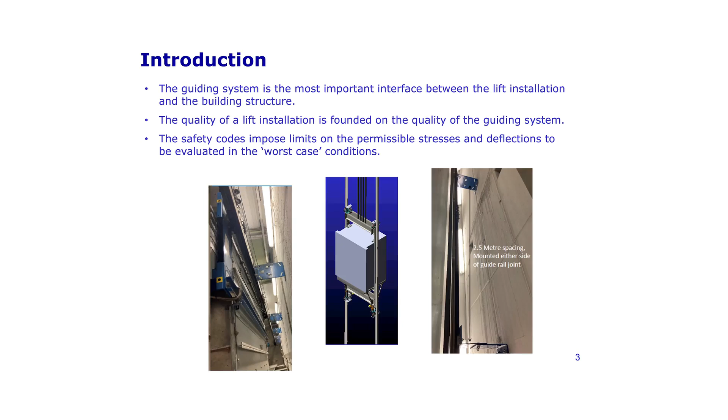So the basis of this paper comes from a few years ago when we looked at EN 81-20/50 and the new requirements about deflections of guide rails. And these are some reflections here. Okay, so let's go on. The guiding system is the most important interface between the lift installation and the building structure. The quality of lift installation is founded on the quality of the guiding system. The safety codes impose limits on the permissible stress and deflections to be evaluated at the worst case conditions.

And to do that, we have got in the codes quite straightforward models. So I will explain some fine aspects of those models. They are very simple, but there are some aspects which I found not everyone knew. So I will not be discussing CAD, okay? However, CAD can be used, and we know that FEM analysis is one of the code-approved methods to do analysis. I will show the straightforward models, which are simple analytical expressions coming from classical mechanics.

Okay, so I will demonstrate this in terms of what would need to be the spacing of brackets to meet the requirements, for example, of deflections. And we know that there is a straightforward way to do it. So I will show also some numbers here to illustrate those before making some further work in terms of more complex scenarios.

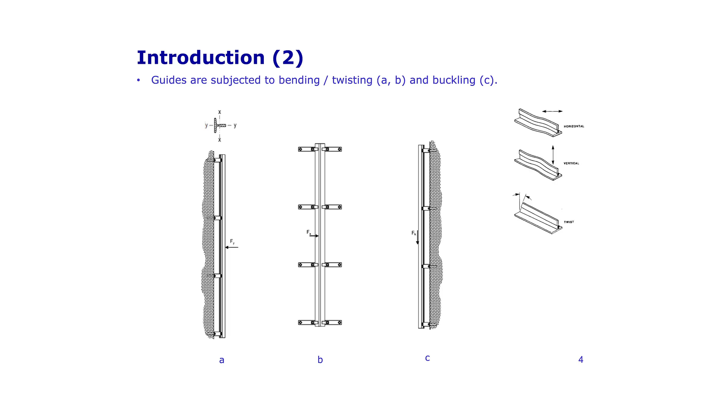Okay, so we know that in EN 81, and other codes as well, the guides are considered to be subject to a different range of loads. And here in examples, everyone knows it's subject to bending. Okay, the older code is also saying that there's twisting. Yes, it does. However, when you do bending of the flange, this actually can accommodate this. And also we have buckling and different scenarios, and everything is based on the worst case scenario. So the straightforward models in EN 81-20/50 are based on the worst case scenarios.

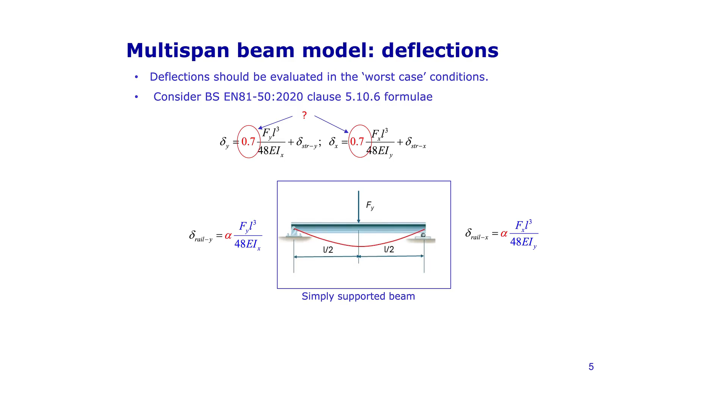So what the models are, whether they are sufficient to make the judgment, and how confident we are with the results, everyone knows that affects the design. Okay, so deflections should be evaluated at the worst case condition. Okay, so that we know. So for example, safety gear operation, acceleration, deceleration.

Obviously that is linked to this equation here, which accommodates the dynamic conditions. Because if we look here, EN 81-20/50, clause 5.10.6, has got these two formulas when you are bending in two directions, y and x, okay? And we know them very well, everyone has seen those. And the point is here, the first question which was established here: the coefficient 0.7. Where is it coming from? Because everyone probably knows from fundamental mechanics this blue formula here, that's for a simply supported beam.

So we are not using a simply supported beam model to evaluate deflections in guide rails. It's something else. So what is it? Does someone know? I'll give an answer right now. So basically, this coefficient alpha here, if we used this, would be 1, but it's not. It's 0.7. Okay, the answer is actually quite straightforward.

If we look here, if we take the classical, simple model when the guide rail is treated as a multi-span beam subject to lateral loading, okay? So we've got a load, and I'm looking now at one direction only. This is not the simply supported beam anymore, because it's got multiple brackets. And that's basically what we see, okay? We have a very long beam with multiple brackets. Okay, so if we calculate deflections of this, and you can do that, that's not difficult. You can do it with a simple calculator.

You don't need to have a big computer power. That's a classical method. That's the equation, how you do it. Basically, that's the deflection. So deflection y, that's z-axis here. And when we apply load here, we can calculate from this formula everything, really straightforward. Obviously, we need to know the reaction forces here. So when we know F, we calculate those.

The problem is that in classical mechanics, this is referred to as not so straightforward a model. It has got some difficulties because we need additional equations to solve it. But anyway, you can solve it. And if you solve it, you can come quite quickly to some results. All right.

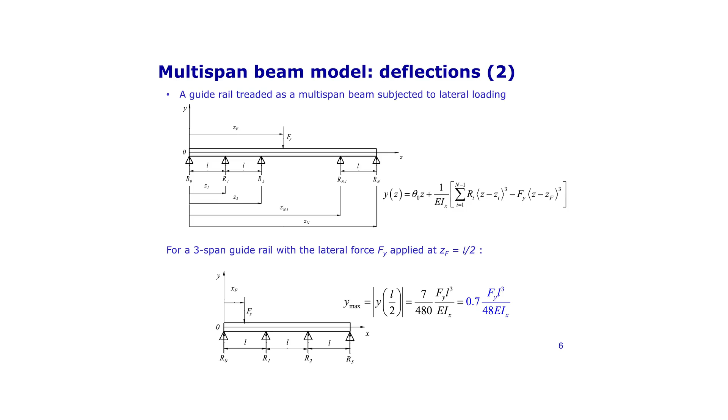This example here is limited to 3 spans. So 3 spans means if you have here 1, 2, n minus 1, n, you have n plus 1 brackets, and we now do the calculations of maximum deflection of this model. That's the result here. When we apply the load in the middle of the first span, the maximum deflection is 7/480 times FL cubed over EIx.

Everyone knows what is F, the load, and L. L is the spacing of the brackets, E is the Young's modulus, and I is the second moment of area, x or y. And that's undergraduate mechanics or even less. So now when we slightly change this coefficient, you get 0.7, 7/10 over 48. And here it is. That's 0.7, that's the coefficient alpha.

So the code EN 81 is using a 3-span beam model. That's the answer to the question. And obviously, that's common knowledge in some advanced analysis, for people who know mechanics, but from my experience, not everyone knew it. So that's basically conclusion 1.

We use the 3-span model. Now, when you do deflections and you go to bending, and bending is the key issue, what next? Is it enough? No, we need to look at stress. So what would we do? We could take this beam and find the maximum bending moment, because there's bending here.

Well, you go to EN 81-50, and there is this equation for maximum bending moment. And this does not relate to this model at all. It is based on the model on the right-hand side, which is not a simply supported multi-span beam. It's a single-span beam with one end simply supported and the other one fixed or built-in. And then the maximum moment is given by this formula, which is in the code.

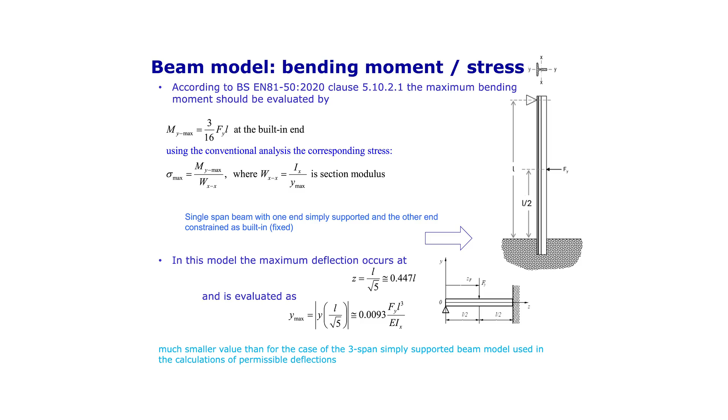And we don't see it in the codes. In the code you always have this, and obviously you have this equation. When you have a moment, you calculate the maximum stress from the maximum moment and the section modulus. Everyone knows it. But this is not based on the deflection model. There's another model, and again, this is the worst-case condition. So we use the worst-case condition for deflections, and the straightforward model is the 3-span simply supported beam, and here we use another model.

If you calculate the maximum deflection with this model, it wouldn't work, because the maximum deflection for this beam when we apply the force in the middle is more or less at 0.45 L. And the maximum deflection is 0.0093. And we saw earlier 0.7 divided by 48, that's different. So a much smaller value than for the case of the 3-span beam.

Now that's quite clear, and we use this formula, and then we get maximum stress, and when deflections are within the limits and stresses are within the limits, we are okay. Really quite a simple equation, isn't it? This is not much involved. You can do it by hand. We teach it in our lift courses, we teach it in mechanics. Everyone who knows mechanics would do that.

So now let's have a look at another point which is linked to it. I wanted to discuss bracket spacing and what the design calculation will be, because clearly everything depends on the spacing of the brackets. So here we've got the two equations for deflections. Again, I stick to deflections. And we know now where they're coming from. It is from this 3-span beam model.

And the clause here in EN 81-20, 5.7.2.1.2: the combination of deflections of guide rails, deflections of brackets, play in the guide shoes and straightness of the guide rails shall be taken into account in order to ensure a safe operation of the lift. All right, so that's why we have to look at this.

That is taking some additional component, okay? So if you apply only this model, it doesn't take into account play in the brackets, anything like that, okay? It doesn't take into account the structure of the building. So what about the structure of the building?

We know that at some stage there was quite a lot of discussion on this. So now we're looking in EN 81-20, and if you look in Annex E2, there's a statement that's highlighted here: it is important that the guide rails of the lift are supported in such a way that the effects of movement of the building structure to which they are connected is minimized. Okay, so we are looking to minimize. Very often that assumption would hold, but sometimes not. And we know the discussion for tall buildings that might be different.

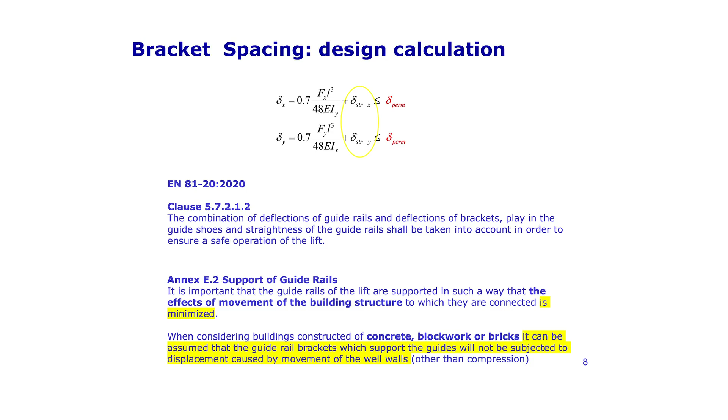So when considering buildings constructed of concrete, blockwork or bricks, it can be assumed that the guide rail brackets will not be subject to displacement caused by movement of the walls. That's reasonable. However, there's another paragraph here which says you cannot use this assumption when there is a steel structure or wooden structure. That you need to take into account. And analytically, then we are in trouble. The guide doesn't prescribe it. So obviously, most of this kind of work can be done using FEM and CAD systems.

All right, so where do we go from here? We should use, and I always advocate, a simple formula which gives a first evaluation. So when we teach our students, we want them to use those formulas in the first case. Later on, if someone goes to CAD and models everything, at least this gives the first approximation, and you would see whether a complex model done in SolidWorks or ANSYS or anything else makes sense. That's the way we want to approach this problem.

So a simple example to demonstrate with deflections how this could be done quickly and efficiently. Again, the basis here would be EN 81 and the permissible deflection of 5 millimeters for the car. We have two graphs here. It's not that complicated, don't worry, I'll explain. In this example we take a conventional car frame, a car rated at about 1,200 kilograms, subject to safety gear application. That means we need to use a deceleration of an additional 1g, an additional load.

When we do the calculation for this system, we can calculate the forces in both directions, Fx and Fy. They are bending forces, which accommodate deceleration, but this is progressive safety gear. Then we can draw two simple diagrams based on those equations, but without the structure. From this equation, the characteristic would be the Iy second moment of area in terms of L, a cubic polynomial, and the same for Ix. Then we impose a permissible deflection of 5 millimeters and come to those blue lines.

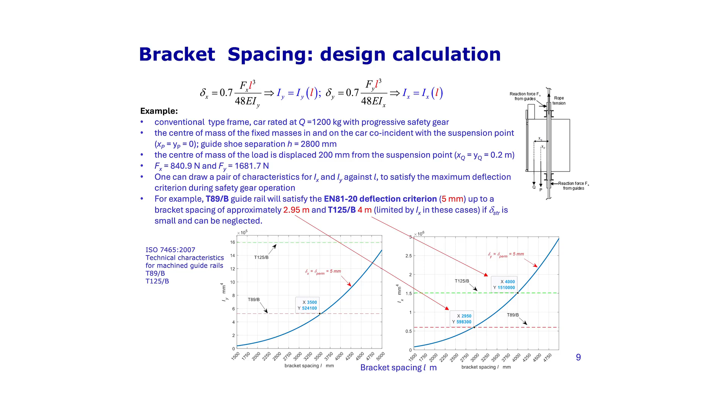Now we can go to the ISO standard and choose, say, T89B or T125. Then we draw horizontal lines where we have those values of Ix, and at the intersection, we take the second characteristic to come up with the spacing which is statically safe for the system, which here is 2.95 based on Ix. That's the maximum spacing for this rail, or you can take a bigger one and get larger spacing. This spacing meets the condition of 5 millimeters for the car.

Now we would still need to check the stress, using the other formula, but that's obvious, so I won't go any further. So this demonstrates 5 millimeters would meet the condition for the standard. Is it good enough? No, it is not good enough, because we know that some manufacturers, and there is Schindler, which everyone looks to, say this will not give good ride quality.

So, okay, now I want to explain, again, using some numbers, why not. All right, so let's go here. To maintain ride quality of a lift, required guide rail deflection limits should be much smaller, right? And Schindler is saying something like 1 millimeter maximum for slow lifts, I think this is 4 meters per second, and anything above 4 meters per second should be half a millimeter or less.

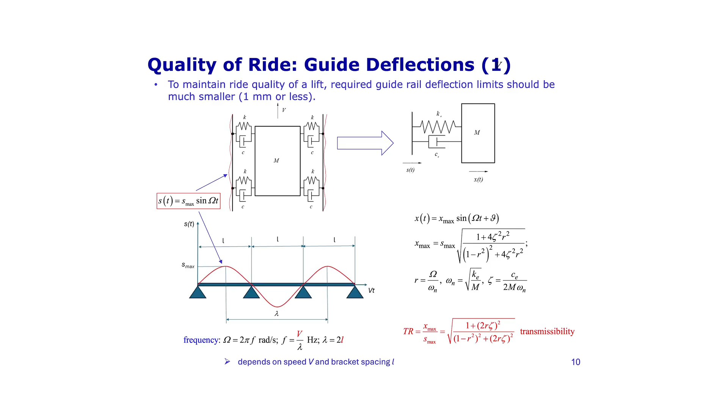And then we drive the car along this wave. The frequency of this wave can be calculated readily in terms of guide bracket spacing through this formula here. There is V, the speed, divided by the length of the wave. So what is the length of the wave here? From here to here is 2L. So obviously guide bracket spacing will affect it, and the higher we go, the higher the frequency is.

V, let's say 5 meters per second, then we take this 2L, divide it, and you've got the frequency. And that's what is linked to the Schindler or any other manufacturer's recommendations, because the issue is the frequency. Speed is related to the frequency. So for this, I need to go back here to some simple analytical equations, nothing computerized at that stage. This wave can be treated as a simple harmonic sinusoid with the frequency omega, which depends on the speed and bracket spacing.

So we apply this motion here, and what happens then? This mass is moving. The motion at the base is s, the motion of the car mass is x, and now what is x by s? X maximum by s maximum can be given via this simple formula, because x is also sinusoidal, it comes from simple mechanics, with the frequency of the guide excitation. So then we arrive at this expression, which is in terms of basically two main parameters.

All right, this is illustrated through a simple experiment in the lab. This is a base, nothing to do with the rail, a moving base. That's the structure here, and this structure has a natural frequency of about 5 Hertz. Now when we come to this place, we've got resonance. So that's basically what we are getting from a badly bent guide rail. It's a resonance.

So again, everything is going down. So that's a simple model, straightforward model, okay? But now not static, it's dynamic. Then I come back. All right, when we want to get a bit more involved, I'll just go very quickly through this example. I think I still have a minute or two. Then we can use a more involved model, okay?

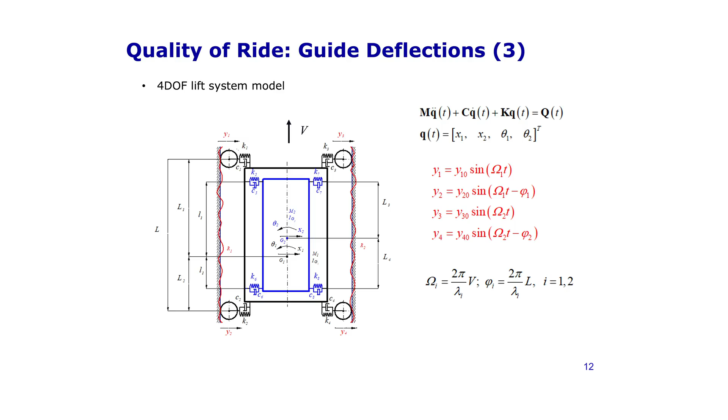This model has got 2 masses which can move horizontally and we can rotate. Okay, then there's a bit of number crunching involved. We need to use this equation which needs to be solved, and that has got 1, 2, 3, 4 coordinates. And in this system, we have not just 1 frequency, but 4 frequencies. So when we look here, put some numbers, that's the simulation for 10 meters per second, the guide spacing 2.5 meter, and again, it's going over when that is badly bent.

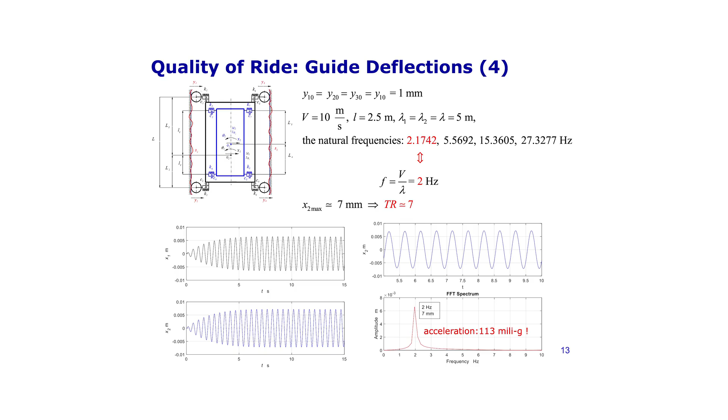The result is here. That's the frame, horizontal motion. That's the car, horizontal motion. Take this. You see the deflections, 0.5, about 7 millimeter. 7 millimeter, that's the frequency spectrum. At 2 Hertz, it's not a good outcome, because that gives us acceleration of over 100 milli-G peak. All right, so here we go. We have 1 millimeter deflections, and dynamically it would not be satisfied.

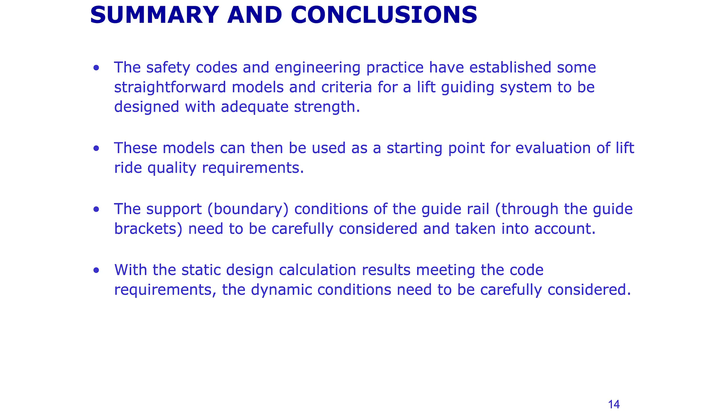So that's about it. So let's do some quick conclusions. The safety codes and engineering practice have established some straightforward models and criteria for a lift guiding system to be designed with adequate strength. True. These models can then be used as a starting point for evaluations of lift ride quality.

Okay, sort of, because then we still need to consider the support conditions, how they are supported, and then again you need to go back to static, whether we have a 3-span beam or we've got a supported and fixed beam. But with static calculation results meeting the code requirements, the dynamic conditions need to be carefully considered.